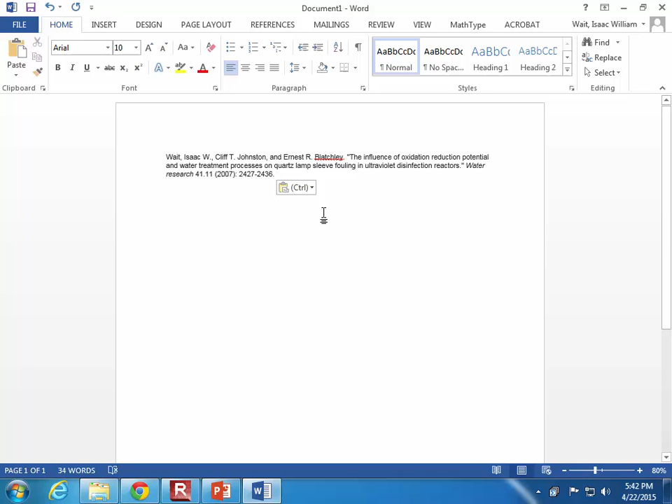Questions about the research paper due next week? Why do you suppose I've asked you to write a research paper? Is it because I just like to have you in pain? Is that the reason?

Why do you think? It's partly because I like you to be in pain.

But the main reason is because graduate school is more about learning how to teach yourself than learning a certain subject. People who have graduate degrees are assigned to unfamiliar tasks. If you graduate with only a bachelor's degree, probably you'll be designing something that's already been done somewhere else. But once you have a master's or doctorate degree, they'll start to assign you to a problem that nobody has ever seen before.

Someone with a graduate degree has to have practice with an unfamiliar problem and learn where to start finding the current research being done in the field, because maybe your problem is on the cutting edge of some new field.

A master's educated engineer has to be able to draw together lots of different sources. Even if 95% of a research paper is irrelevant to you, maybe they'll mention one or two things, just a tiny bit that will be important. So you have to get in the habit of finding the important information in a paper that, for the most part, means nothing to you.

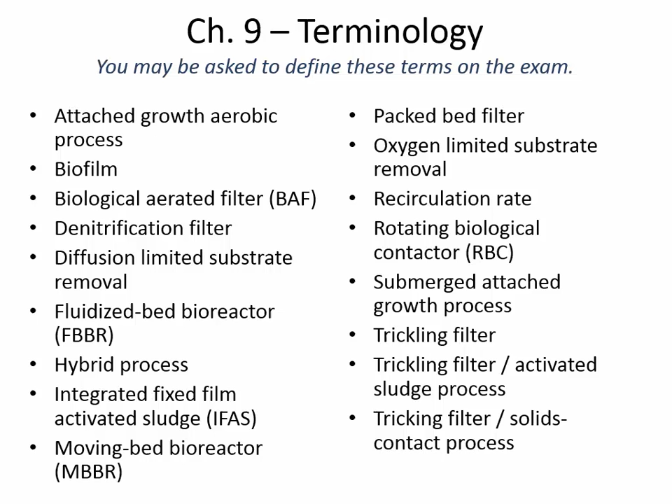What we're talking about tonight is anaerobic treatment. We've had some brief sections previously where we've had anaerobic conditions inside a reactor, for example, when removing nutrients, conditions need to be anaerobic.

In aerobic treatment, you have to provide the oxygen, and that's expensive because you're usually providing it with a diffuser, with big fans blowing air into the diffuser so it can bubble up through the aeration basin. Even with a trickling filter, where you save a lot of money compared to activated sludge, you still have to pump the water to the top, so you're still spending money in electrical costs to provide the oxygen.

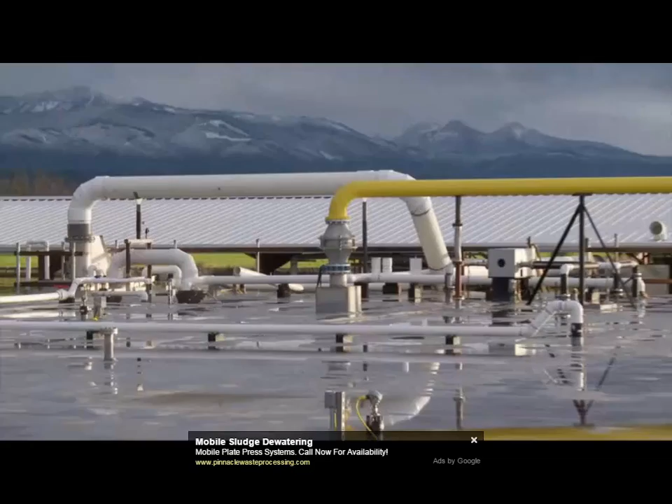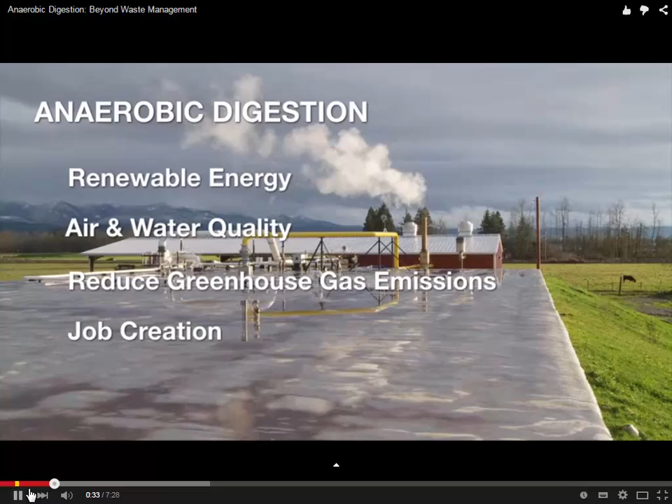Technology offering many benefits to society. Far too often, though, this method of organic waste treatment is touted only for its ability to produce renewable energy. However, anaerobic digestion also helps improve air and water quality, reduce greenhouse gas emissions, and can even be a source of job creation for local economies. Furthermore, the next generation of anaerobic digesters is at the center of a system of technologies capable of producing even greater benefits.

Digesters have been around for a while, but we've got new technology that allows us to take this to a better place economically and environmentally. Traditional methods of dealing with organic waste include sewage treatment plants, aerobic lagoons, compost yards, and landfills. However, unlike anaerobic digesters, these solutions more often than not consume rather than produce energy.

Digesters come in many different designs. Some treat municipal sewage or urban food waste, others process animal waste. In this video, we will use the example of a rural, dairy-based system. But whatever their design, all digesters follow the same underlying concepts.

Anaerobic digesters are basically carbon conversion tools. They simply take the organic carbon inside the manure and turn it into gaseous inorganic carbon, called biogas. Biogas is methane and carbon dioxide. It's the methane that we really want - we can use it for fuel or as power or electricity.

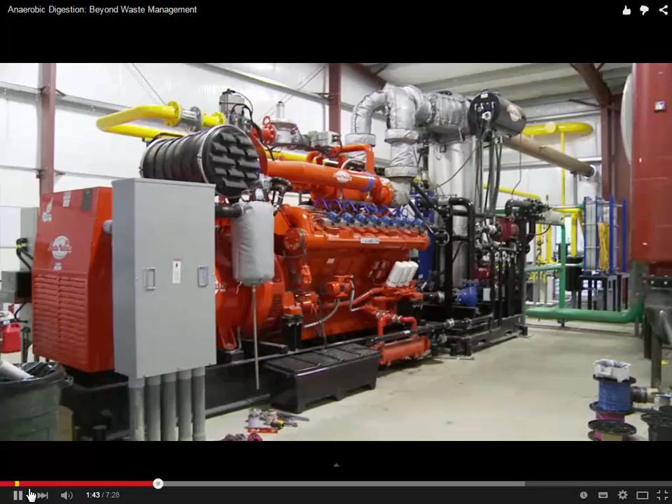Without anaerobic digestion, manure management has traditionally been limited to simply storing untreated manure in lagoons and later applying the untreated liquid onto fields. However, this practice leads to potential air and water quality issues, such as nutrient overload into soils, release of phosphates and nitrates to water supplies, and emissions of odorous volatiles, ammonia, and greenhouse gases such as methane and nitrous oxide.

Anaerobic digestion, as part of a system of integrated technologies, can address all of these issues. It gives us the diversification to have more than one item to sell, and also helps us control the nutrients, the manure, and that sort of thing.

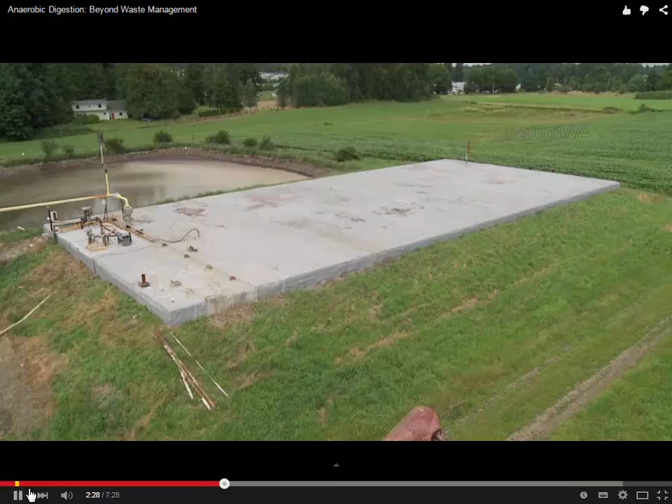At the center of the system is the digester itself, basically a sealed tank where the organic material is broken down. On this dairy farm, cow manure and potentially off-farm organics from the community are collected in a holding pit, then pumped into the digester. The tank mimics the digestion process of an animal stomach.

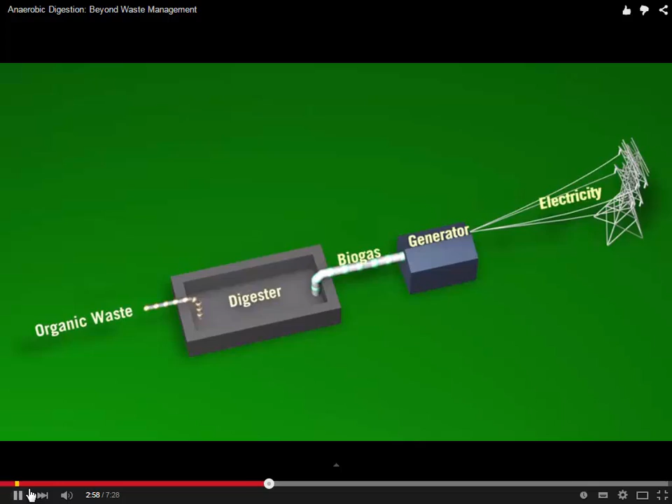Inside, the liquid is heated, agitated, and mixed in an air-free environment. This converts the solid carbon in the manure to biogas, which is collected, cooled, and used to power an electrical generator. The electricity can be sold to the local utility and sent out to the grid. The system itself creates the energy needed to keep the process going - temperature and flow are maintained using excess biogas and heat reclaimed from the generator set.

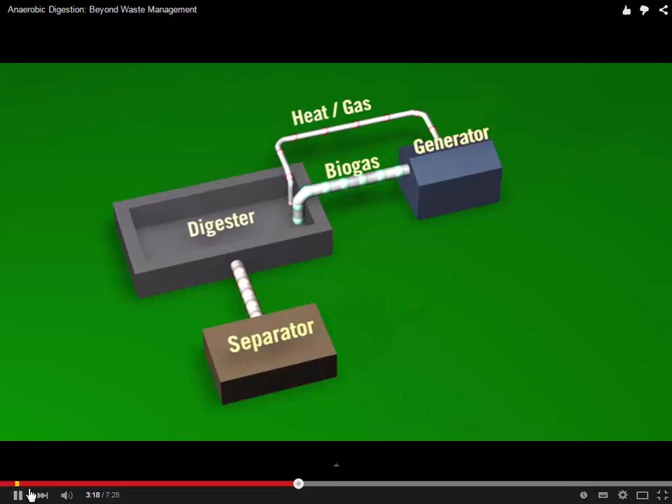After the biogas is captured, the treated manure is pumped to a separator where the liquid is removed. The remaining solids can be used by the dairy as bedding for their animals, or even sold for profit as a soil amendment or peat moss replacement. The treated liquid is stored in a lagoon for watering crops. Unlike untreated lagoon water, this liquid is significantly reduced in pathogens and virtually odor-free.

For the current generation of anaerobic digesters, this is where the treatment process usually ends. However, even greater benefits and value can be gained by adding additional components to the system.

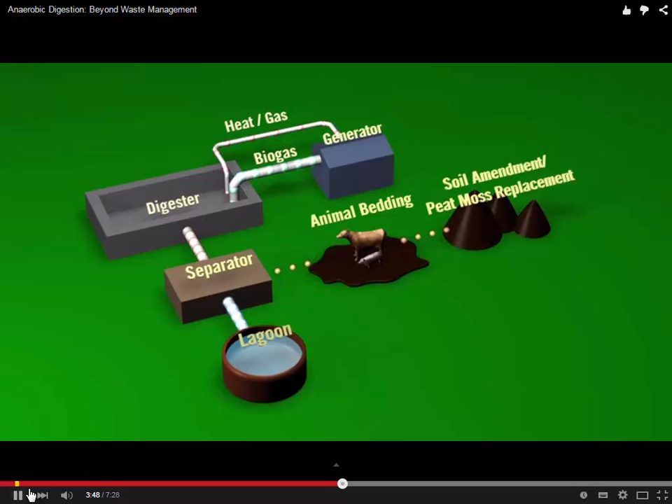One example is nutrient recovery. Anaerobic digesters by themselves do not do a very good job of treating the nitrogen and phosphorus in the manures or organic waste. Too much fertilizer, too much nitrogen and phosphorus, can be harmful for the soil and plants, as is the case at some of our large animal farms. Therefore, we need nutrient recovery units associated with our digesters.

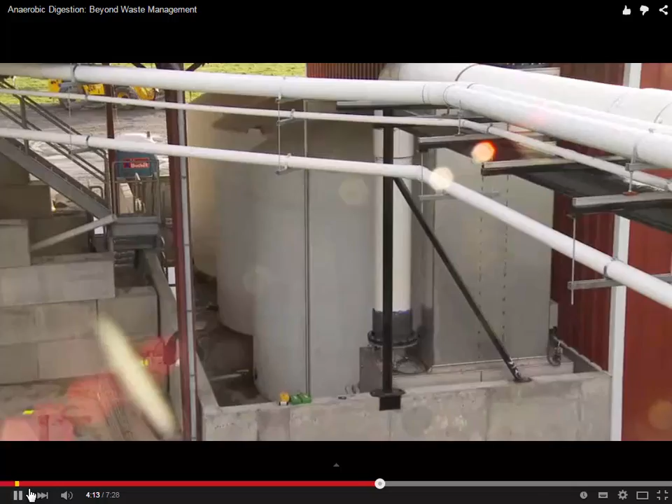Nitrogen, in the form of ammonia, can be reclaimed using a revolutionary new technology developed by Washington State University and its industrial partners. The process is far less expensive than existing methods. We can collect it and make it into an ammonium sulfate fertilizer that farmers have traditionally used for years. An added benefit is that during this ammonia production process, we cause the phosphorus to settle out—so we get a 2-for-1.

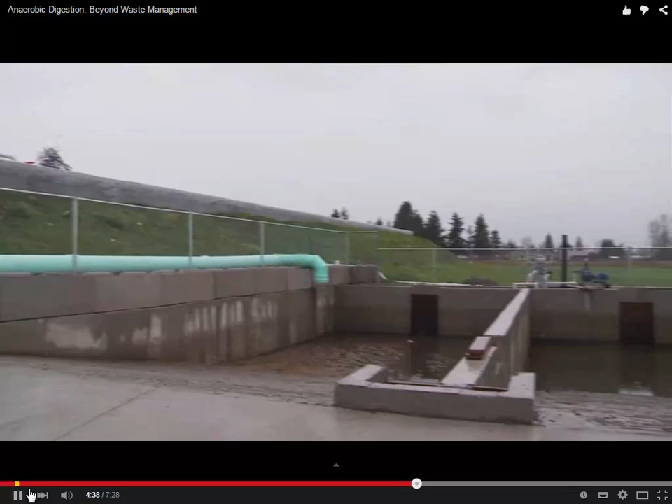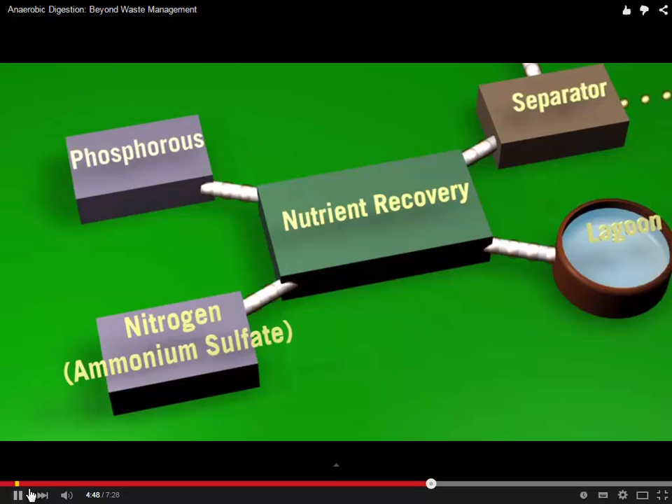These concentrated biofertilizers can be used by the farmer to displace what they presently buy in fossil fuel-based fertilizers. A combined digester and nutrient recovery system is a win-win because we make renewable energy, solve a concern with nutrients, and make revenue for the local community.

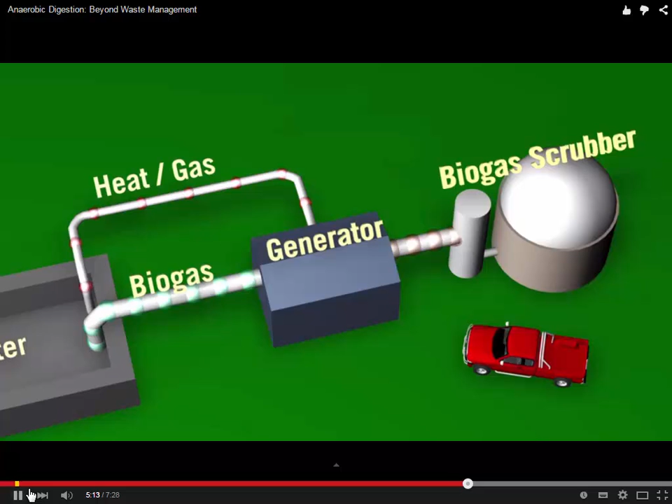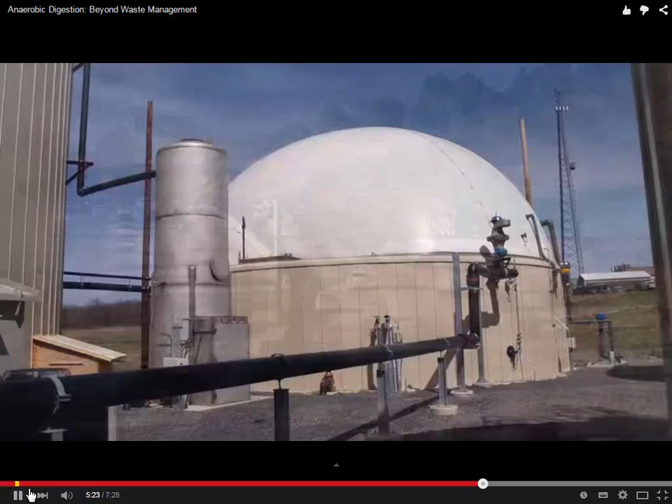Another add-on technology relates to the scrubbing and compression of biogas. In this type of system, biogas is converted to renewable natural gas fuel instead of being used to generate electricity. We're in the middle of a shift from petroleum-based fuels to methane fuels, natural gas, for trucking fleets and cars. We have the technology now to produce renewable natural gas from the biogas that comes off the digester.

It's clean to pipeline standards, and available as vehicle fuel for half the price of diesel. While biogas scrubbing and nutrient recovery are already at commercial scale, pyrolysis and other related technologies are currently in development and hold great future promise. In the future, we'll be able to take this the next step to clean, even drinkable water.

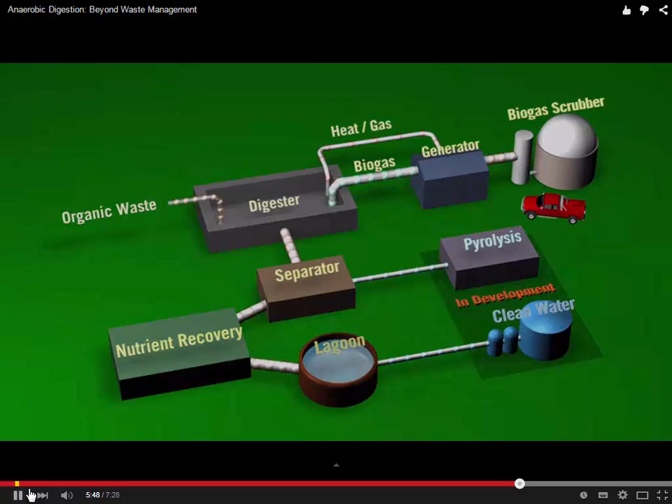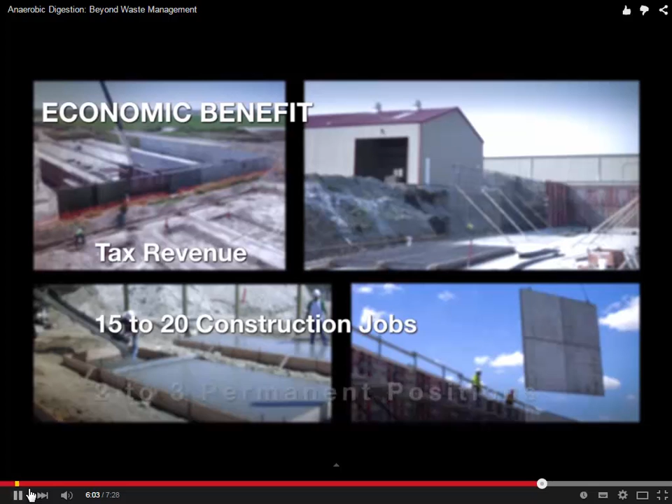Construction of anaerobic digester systems helps state and local economies as well. In addition to tax revenue, it's estimated that in the state of Washington, for example, each digester project creates 15 to 20 full-time jobs during construction and 3 to 8 permanent positions for its operation.

Despite their initial capital cost, with well-conceived business models, anaerobic digester systems offer significant economic savings and environmental benefit over the long term. Everything kind of comes in, goes around, and goes back out as something usable.

There are synergies with this systems approach. We not only have the digester, but we've got these additional units we can plug on, and that requires more capital, but also generates a lot more revenue, making a more profitable package and making this more replicable.

The advantages of anaerobic digestion are well documented: waste management, renewable energy, biofertilizer production, greenhouse gas reduction, and more. With the incorporation of existing technologies and the development of future ones, the benefits will only continue to grow.

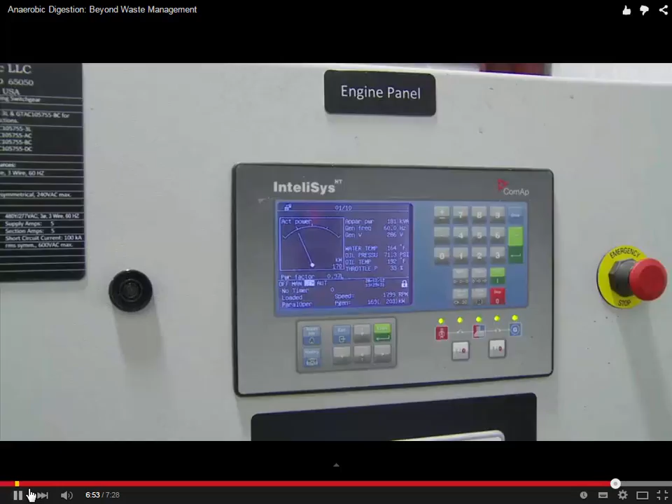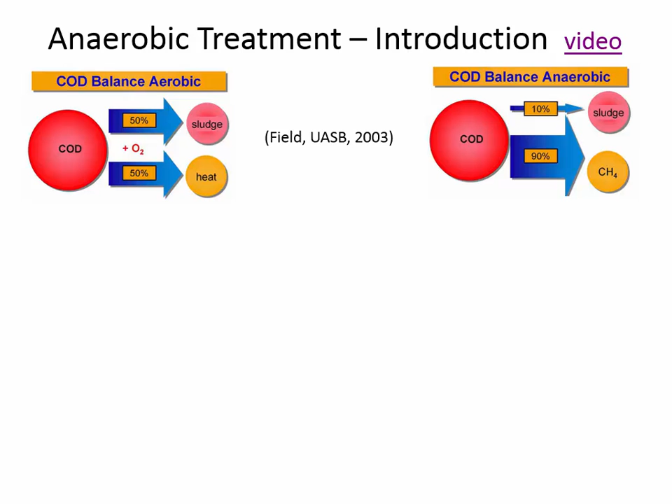So, although that was talking about mostly animal wastes, the same principles apply for treating municipal waste and waste generated from humans as well. These anaerobic treatment processes can be used along with suspended growth or attached growth, and can be used to treat the sludge that comes out of a clarifier of either of those. There are a lot of different configurations of what goes on inside of that pit.

In the video we just watched, it basically looked like they had grass growing on either side of the tank and then a concrete top on the tank. So what's going on inside that anaerobic digester is what we're going to spend some time talking about this evening. As far as the chemistry, what's happening inside—first of all, the complex waste components have to go through a process of hydrolysis.

Hydrolysis breaks down fat and protein into less complex molecules—triglycerides, fatty acids. Then the next step is that those products are turned into short chain acids. Let me show you a diagram here: the complex waste is broken down into acetic acid.

Then, in parallel, both acid fermentation and methane fermentation are happening simultaneously to form carbon dioxide and methane. Regardless of whether or not you have anaerobic digestion, much of that carbon is ultimately going to end up back in the atmosphere. But the benefit of doing anaerobic digestion first is that you have an intermediate step where the methane can be used to generate heat and electricity.

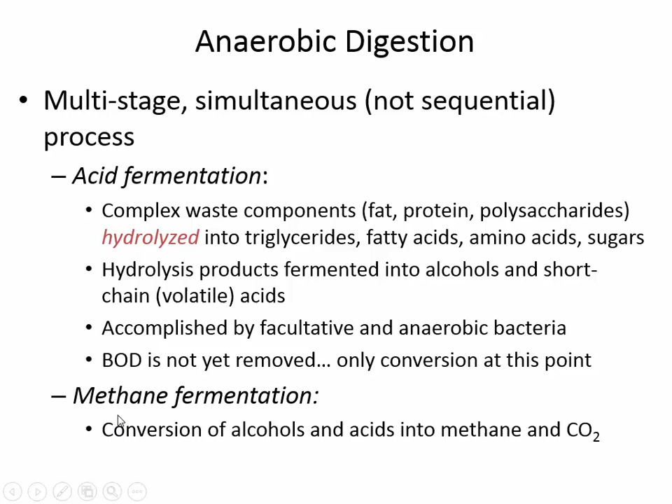So if we go back here, the methane fermentation—really the step that generates the value—is where you're converting alcohols and acids into methane.

There's less volume of sludge that has to be treated, and the reactor volumes are actually smaller as well. The reason is that the waste is a lot more concentrated than it would be if you're doing aerobic treatment. The suspended solids concentration in an anaerobic reactor can be 20,000 milligrams per liter or even beyond, compared to a typical solids concentration in an aeration basin of maybe around 2,000 milligrams per liter.

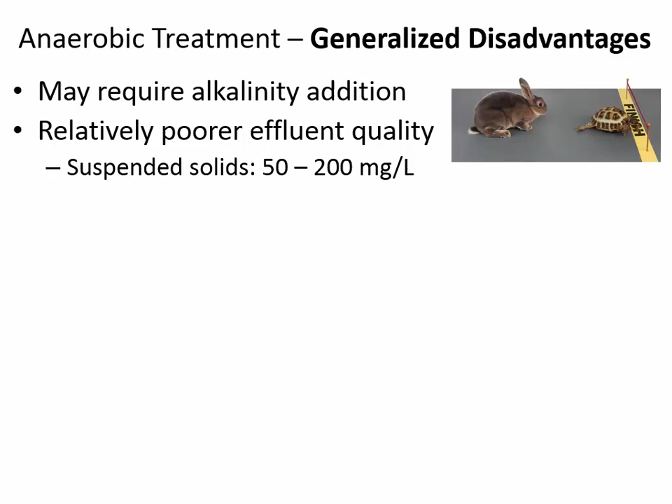Another thing is that although it's really good at converting dissolved COD into methane, there's not a lot that the anaerobic digester is going to do for suspended solids. So this typical suspended solids effluent quality is still going to be above treatment limits. It's not just a one-step solution and then the effluent is ready for discharge—that's not the case, primarily because of suspended solids.

Then there can also be long startup times, three months or even more, before the reactor is actually performing at steady state. As mentioned in the video, it's good for breaking down carbonaceous pollutants, but the anaerobic digester itself doesn't remove nutrients. The animated diagram they kept coming back to showed that you have to have separate steps to remove the nutrients and then recycle them as fertilizer elsewhere—it's not in the anaerobic digestion that nitrogen and phosphorus can be removed.

Also, as shown in the previous slide, there's a necessity of diverting some of the methane to heat the anaerobic digestion reaction. If that heating is lost and the liquid starts cooling off, there is a huge reduction in the efficiency of anaerobic treatment when the temperature goes below 20 degrees Celsius.

Some anaerobic digesters can be very susceptible to toxic substances, and because hydrogen sulfide can form in wastewater, that can cause odor problems or corrosive gas, and it's also harmful for people, as we've talked about before. So it's an anaerobic environment, meaning sulfate can go to H2S.

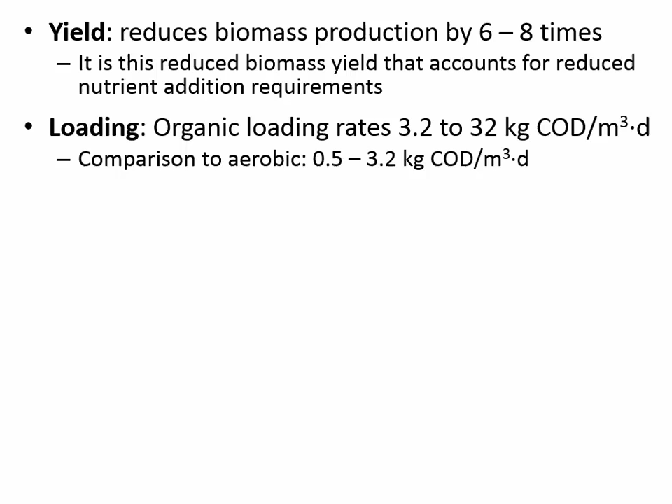This is measured in kilograms of COD per cubic meter of digester volume. These loading rates are 10 times higher than we'd see for an aerated secondary treatment basin. Compared to aerobic treatment, the max would be 3.2 kilograms per cubic meter, compared to 32 kilograms of COD per cubic meter for anaerobic treatment.

We've already talked about alkalinity and how the reaction basically consumes alkalinity because CO2 is speciating into carbonic acid. The problem with temperature is when it gets below 20 degrees Celsius, part of the chemical reaction gets stuck, and fatty acids accumulate. So let's go back to this chemical diagram.

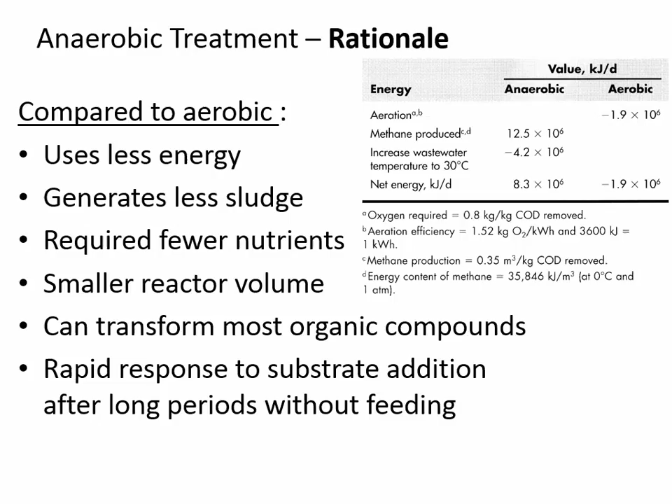Methane fermentation is particularly sensitive to temperature, while acid fermentation isn't. It's a two-step process, but one of the two steps stops below 20 degrees Celsius, so you get an accumulation of intermediate products. When that happens, foaming can occur inside the anaerobic digester. So it's a real challenging issue when temperatures go too low.

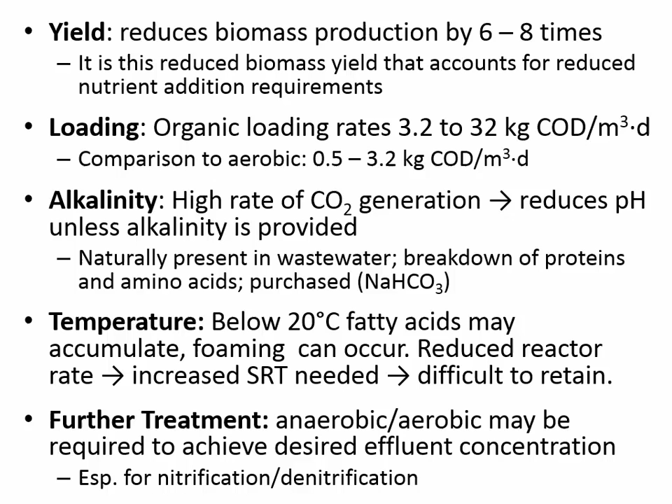And remember, the video said you have to have additional treatment beyond anaerobic digestion, especially for removal of nitrogen and phosphorus.

So where would you use anaerobic treatment? Here are some of the perfect places for it. It's good when there's high BOD, and it's good when there's less nutrients, since it doesn't remove nutrients—we'd love to find an application where that's not an issue. Places with already elevated water temperature are good too, because that means you use less of the methane to heat the water before treatment.

So breweries, where water coming out of an alcohol distillery or brewery is heated in the process of using it—that's great. Food processing in general, typically the water is used not only to process the food but also to cool the food products, so the water itself is warmer than it otherwise would be. So here are just a few cases of industrial wastewaters where anaerobic digestion can be pretty effective.

Food processing wastewaters have really high COD concentrations. If you don't have at least 1,500 milligrams per liter, that's not enough for the methane to generate enough energy. So you can't just replace secondary treatment with an anaerobic digester—that's not a high enough COD. It has to be something more concentrated than that.

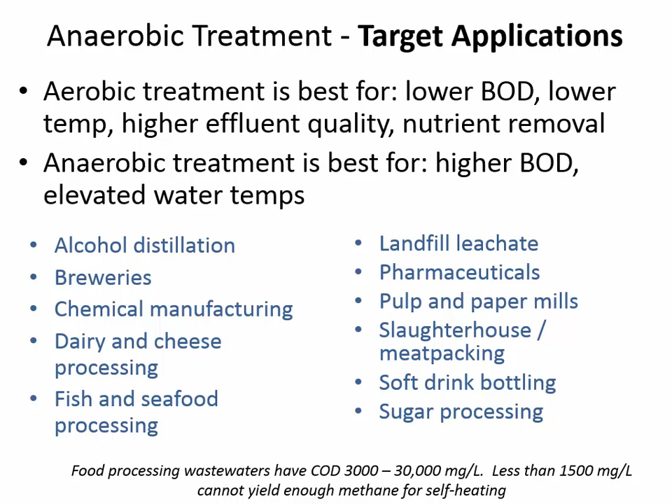So it could be the sludge solids coming out from underneath the secondary clarifier—that would have a high enough BOD concentration, but not just the raw water going into secondary treatment, because a typical COD concentration of the wastewater might only be around 200 milligrams per liter. Here in Huntington, when we went to the treatment plant, they said they have a really low strength wastewater, about 100 milligrams per liter. But the sludge coming out of the clarifiers might be up in the range where it would be effective for anaerobic digestion.

So how much alkalinity is going to be used depends partly on the temperature and the speciation of carbon dioxide into carbonic acid. If you haven't yet taken the aquatic chemistry class, you'll take that in the future—I think it's offered in the fall—and you'll go through calculations relating to acid dissociation.

Another thing that factors into it is what fraction of liquid gets into the gas phase. Inside an anaerobic digester, it's sealed—that's what makes it anaerobic—but it's not liquid to the very top. We'll see some diagrams of these anaerobic digesters later tonight, but they have lids on them. Part of them is liquid, part is gas, and that gas consists of CO2 and CH4, methane. So the CO2 that's in the gas above the liquid is going to be dissolving down into the liquid, and that's what Henry's law describes: what fraction of the gas will dissolve into water.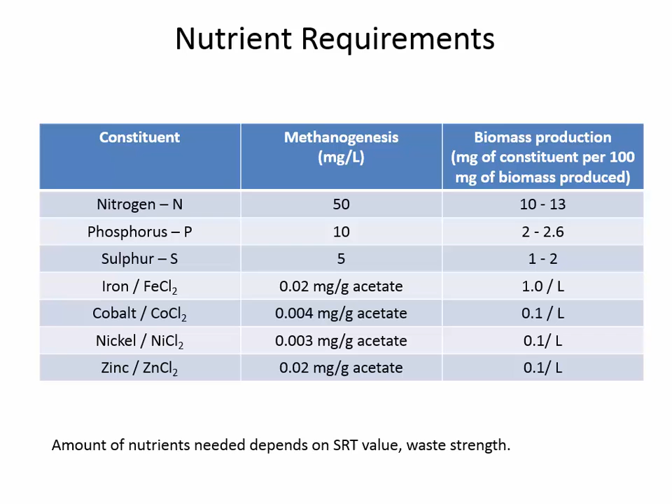One of the perfect applications shown in the previous slide was soft drink bottling plants, where you're cleaning out the bottles—maybe for reuse of bottles that are being recycled—you have to wash the bottles, and the sugar water that's in the soda has to be broken down. It's a really high COD. In the case of Pepsi, it may not have cobalt, iron, or sulfur in the water being treated, so in that case the nutrients might have to be seeded for the anaerobic treatment to be effective.

The flip side of nutrients, which stimulate growth and are required for it, is inhibitors. These are things that slow down anaerobic digestion—that's not the same thing as completely stopping it, though. Sometimes we confuse the idea of an inhibitor with something that will stop the anaerobic digestion process completely.

This first table is showing what concentration is required to moderately inhibit or strongly inhibit the anaerobic digestion process. For example, sodium, which is added to roads during the winter when salt is put down to melt ice, can end up in wastewaters, but it requires a pretty high concentration of sodium before there's inhibition of the anaerobic treatment process. So it requires a lot of some of these things.

But this next table shows the concentrations of some organic pollutants don't necessarily have to be high at all. These are very low concentrations, millimole concentrations, that will result in a 50% reduction in activity of methanogenesis—that's the secondary reaction of fatty acids being converted into methane. Lauric acid, for example, at 2.6 millimoles per liter, would result in the activity being 50% of what it otherwise would have been.

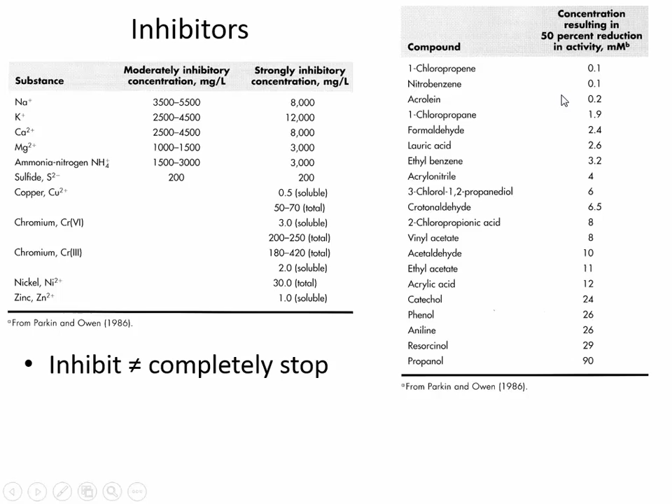Over time, though, you can have a shift in the microorganisms present inside a reactor, and the activity can recover. If it's going to be a persistent inhibitor, the acclimation process means the organisms might be able to get used to some of these pollutants over time.

One way to protect anaerobic treatment is to have it in sequence—in other words, a plug flow reactor—where instead of the incoming liquid spreading out through the whole reactor, you have several different reactors operating in series. That would give you a chance to protect the methanogenesis, which is more sensitive to toxics.

So just to do some calculations tonight, let's take a look at the quantities involved with anaerobic treatment. Here we've got an example relating to the formation of methane gas. As a typical rule of thumb, every gram of COD that gets converted inside an anaerobic digester is going to generate about one third of a liter of methane gas, at standard temperature and pressure of 1 atmosphere and 0 degrees Celsius.

Just to reiterate, in an anaerobic environment, hydrogen sulfide can possibly form. Malodorous means it smells bad. Toxic means it's very dangerous to human health. In fact, if you do a Google image search of hydrogen sulfide, most of the images you'll find are of people laying on the ground.

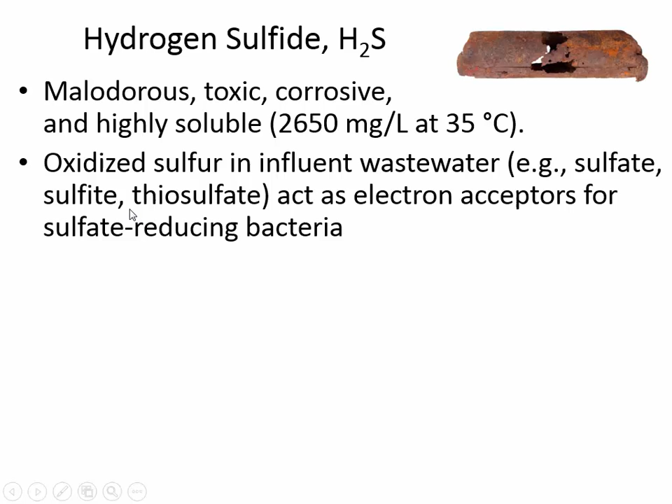It can dissolve in water, so it's not only in the gaseous state, but can also be transported long distances dissolved in the water that needs to be treated. In a wastewater treatment plant, the origin of hydrogen sulfide was sulfate, sulfite, thiosulfate, and then bacteria turn it into hydrogen sulfide in the absence of oxygen.

One of the issues why it's especially a problem inside an anaerobic digester is that it can slow down methanogenesis. It can rob you of the methane you're trying to form, because you want to turn that into electricity.

The text quotes that as low as 50 milligrams per liter of hydrogen sulfide can reduce methanogenesis by 50%, so it can really slow things down. You do have to have some sulfide in order for there to be methane production, but you need sulfide, not necessarily hydrogen sulfide.

So it's sort of like you need a little but not too much. The toxicity of hydrogen sulfide to the bacteria in the anaerobic digester varies based on the pH of the water and what type of organisms have set up inside the reactor. So it's not always as cut and dry as 50 — that's why there's a range of how much hydrogen sulfide is required to start cutting back on methanogenesis.

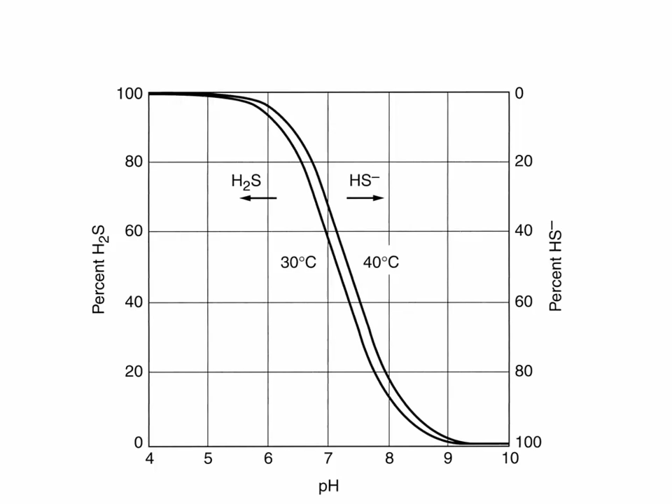This figure shows at what pH you're going to have hydrogen sulfide present versus the sulfide ion. The higher the pH, if you've got a pH of 9 or 10, then the vast majority of it is going to be as the sulfide ion rather than as hydrogen sulfide.

Ammonia is also a problem for the generation of methane, because it can interfere with the conversion of the intermediate alcohols into methane.

Likewise, pH is important for speciation. NH4, ammonium ion, is the majority of what's present until you get to a pH above 9, and then the prevalence of NH3, free ammonia, takes over. So at a pH of 7.4, neutral, only 2 to 4% of the ammonium is as free ammonia.

So you can have a fair amount of ammonia inside a solution. The text says that between 5,000 and 8,000 milligrams per liter are tolerable, and you'll still have methanogenesis if the reactor has adjusted to that over time.

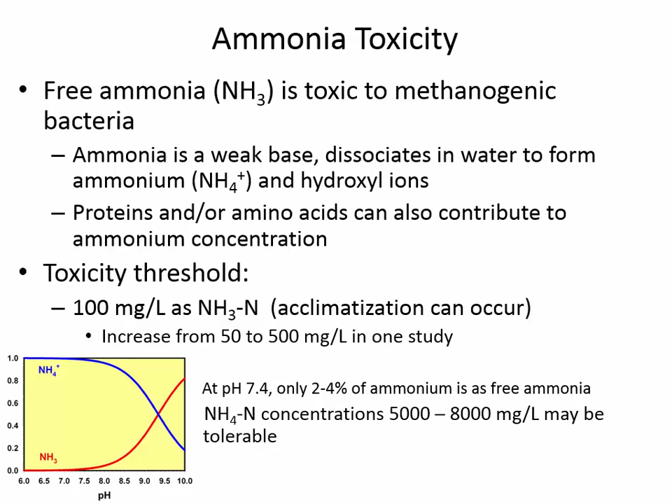Initially, before acclimatization, as little as 100 milligrams per liter can start to be toxic and slow down the generation of methane. So the nutrients not only aren't removed, but in excess concentrations can actually interfere with the primary objective of anaerobic treatment, which is to break down BOD into methane.

So for the next couple of slides, we're going to look at pictures of different reactor configurations and talk about the pros and cons of certain configurations, and look at the typical loading rates — how much COD is going to go into each cubic meter of volume.

The simplest of them is a complete mix suspended growth anaerobic digester. The influent comes into a tank that has an enclosed headspace above it, so that no oxygen is in contact with the liquid, and also so that the gas that's generated can be captured.

Inside here, the residence time of the liquid and the solids is the same, because there's no recycle of solids. So the solid particles, meaning the bacteria and suspended solids, the mixed liquor, have the same storage time as the water inside this reactor — between 15 to 30 days is what's required.

There's a video here that illustrates a typical anaerobic sludge digester, and this is in Michigan.

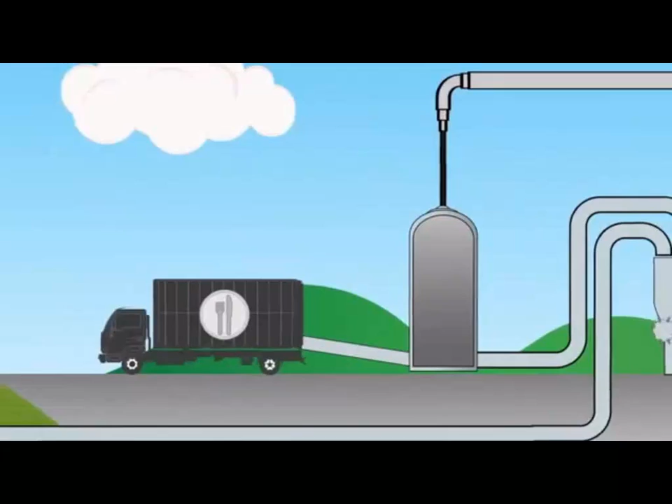This anaerobic digester is used to reduce odor emissions from manure and biosolids, create a closed cycle for recycling organic material, and generate renewable energy. The digester uses dairy, food waste, biosolids, which are nutrient-rich organic materials, and other organic material from campus and the greater Lansing area.

So what's going into there is food from campus, so what's left over from Harless Dining Hall, right? They have some animal manure, and then biosolids from wastewater treatment, so sludge. So what's going in here is sludge, food, and animal manure.

Once delivered, the food and biosolids will be heated at 160 degrees Fahrenheit for 1 hour to eliminate any potential pathogens. The material will then be mixed with manure from the MSU Dairy Teaching and Research Center and pumped into the digester.

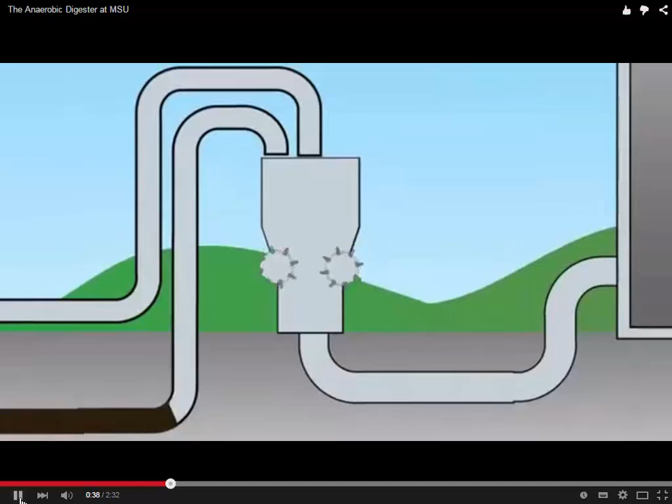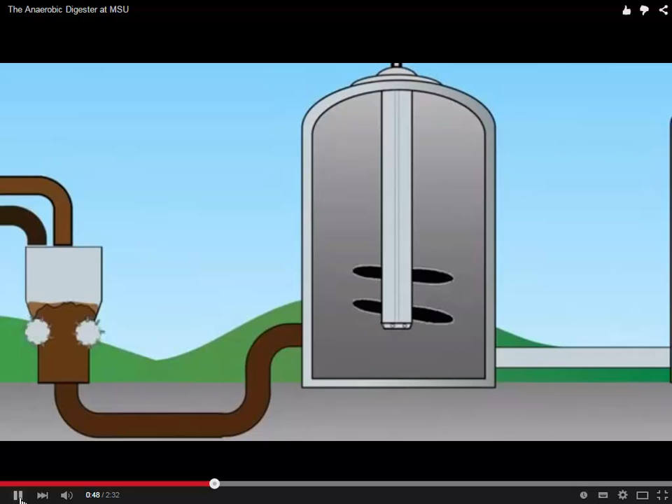The anaerobic digester is a sealed, airtight tank which can hold 300,000 gallons. Organic material will be heated to 100 degrees Fahrenheit and will remain in the digester for 20 to 30 days.

Inside the tank, mixers in the digester evenly distribute microorganisms. These microorganisms break down the mixture, producing biogas and nutrient-rich digestate.

Biogas, which is roughly 60% methane, is a form of renewable energy which will be used to generate electricity. The system will generate enough electricity to offset the MSU Dairy Teaching and Research Center by around 300 kilowatts per hour, with enough left over to help power MSU.

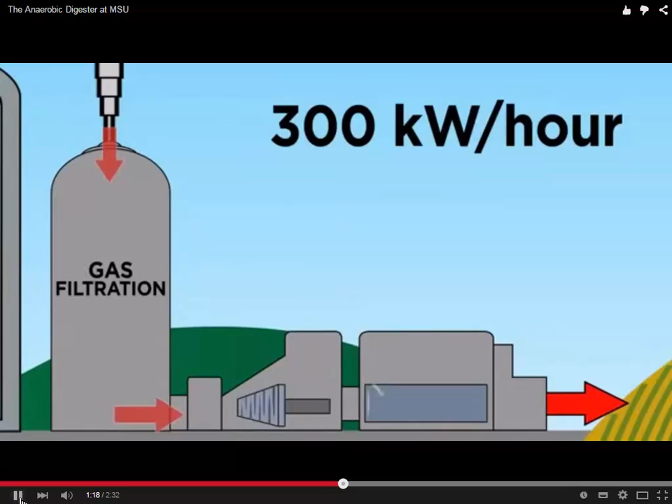The capturing and use of biogas will generate energy, shrink the carbon footprint of campus, and improve sustainability.

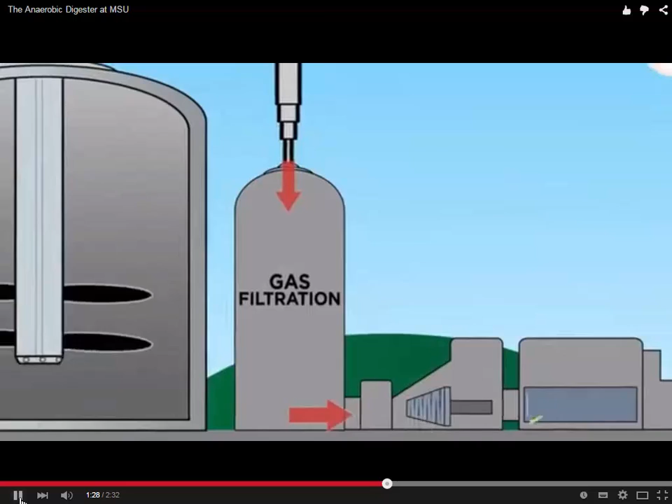What's left in the process is digestate, the nutrient-rich mixture that will be held in the final storage tank until it can be utilized. Mixers in the storage tank will minimize settling for the potential 2.7 million gallons of digestate. Any unused biogas can also be stored in a sealed headspace.

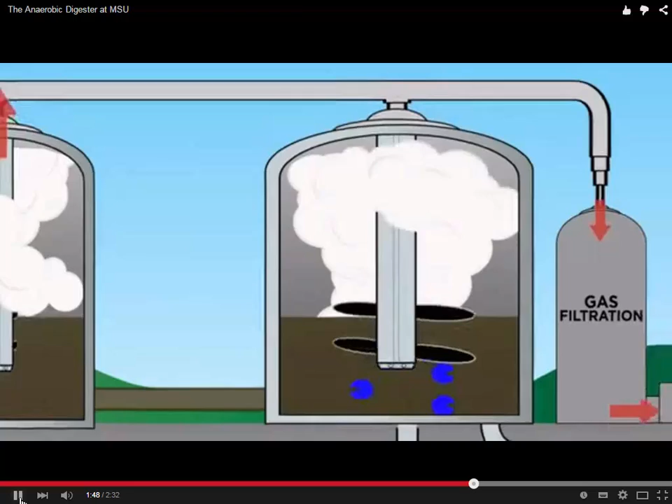The nutrient-rich digestate will be used to fertilize croplands or other biological treatment processes to fuel research opportunities.

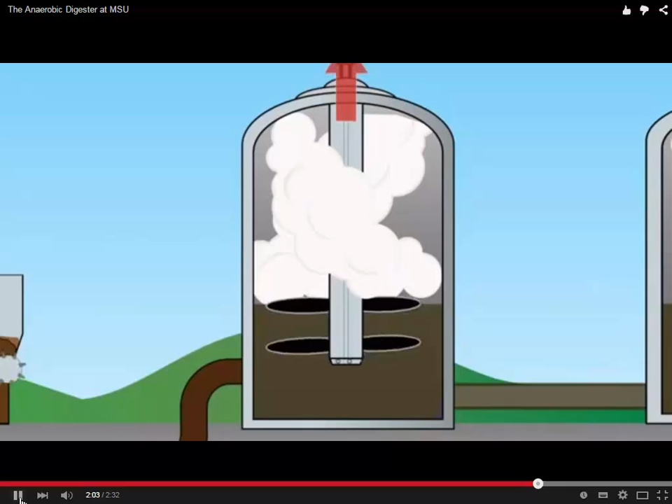By utilizing anaerobic digestion technology, the organic materials from MSU will become resources. Renewable energy is created while odors are reduced and emissions are eliminated. This project is one example of how Michigan State University is actively working to improve sustainability.

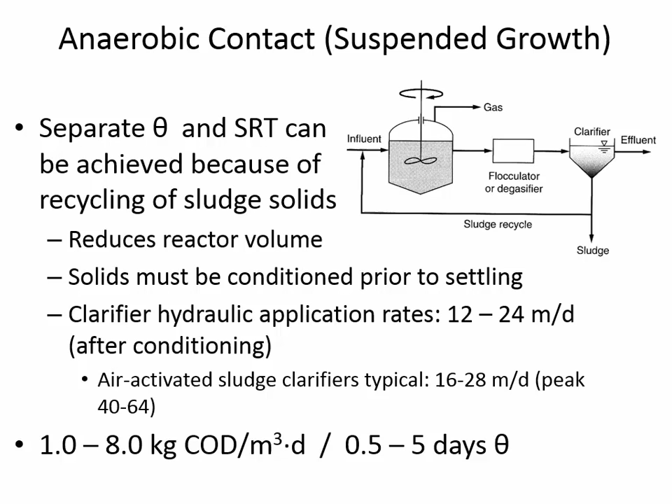Okay, the next one to look at is a sequencing batch reactor. That was one of the questions that was on the concept check that we had earlier tonight. What is a sequencing batch reactor?

We talked about sequencing batch reactors for suspended growth activated sludge. Well, it turns out that the same idea of a reactor acting in different sequences can also be used in an anaerobic environment. So let's take a look at this video. The video is actually about an aerobic sequencing batch reactor, but my guess is that we'd benefit from just thinking about what is a sequencing batch reactor and then apply that into anaerobic conditions. So here's just a pretty good video that shows a sequencing batch reactor.

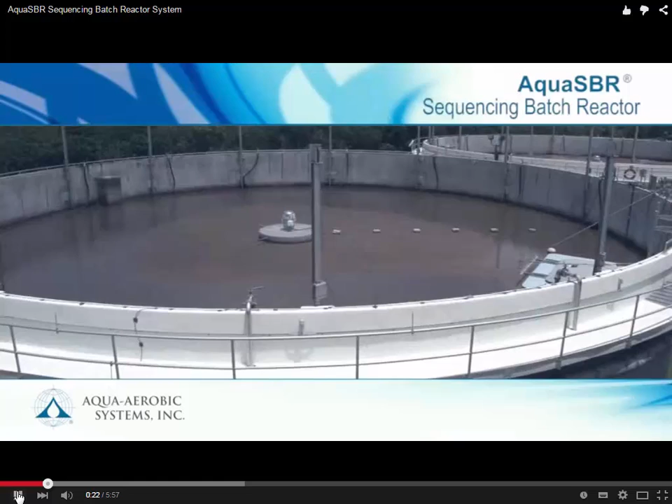With nearly 3 decades of batch reactor experience, Aqua Aerobic Systems continues to lead the wastewater industry with reliable and cost-effective treatment solutions capable of removing nutrients, reducing phosphorus, and producing reuse quality effluent. The Aqua SBR sequencing batch reactor system features time-managed operation and control of aerobic, anoxic, and anaerobic processes with flexible process control that easily adapts to changing effluent demands.

Operation of the Aqua SBR is a 5-phase process, beginning with mixed fill. In this phase, flow enters the reactor.

Okay, so it's called a sequencing batch reactor. It's talking about the first of the sequences. The first sequence is the filling stage.

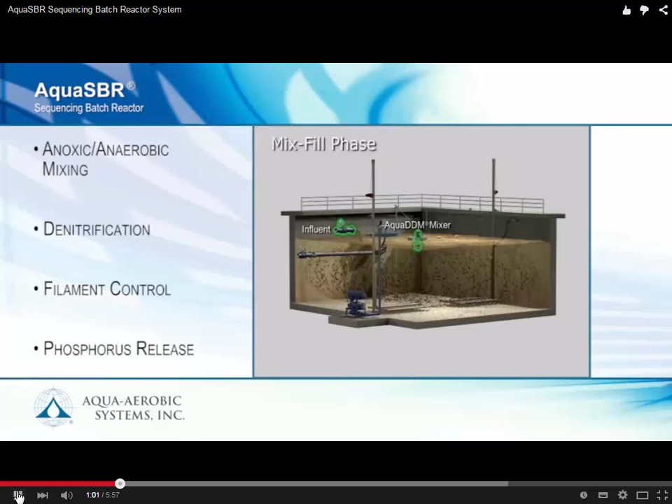A complete mix environment is achieved with a dedicated Aqua DDM mixer. The absence of dissolved oxygen and rapidly depleting nitrate levels create the ideal anaerobic environment, promoting biological phosphorus release. This phase also operates as a fully adjustable selector process to control filamentous organisms.

In the react fill phase, wastewater continues to fill the reactor and aeration is introduced. During aeration, organic material is oxidized and phosphorus is absorbed, while ammonia is converted to nitrates.

Okay, and obviously, if we're talking about a sequencing batch reactor for anaerobic treatment, there wouldn't be any aeration. So we have to keep in mind that you can use the sequencing in both an aerobic environment or an anaerobic one. Today we're talking mostly about anaerobic digestion. This reactor would have a roof on top so there's no contact with oxygen, and they wouldn't bother aerating if what they're going for is anaerobic digestion.

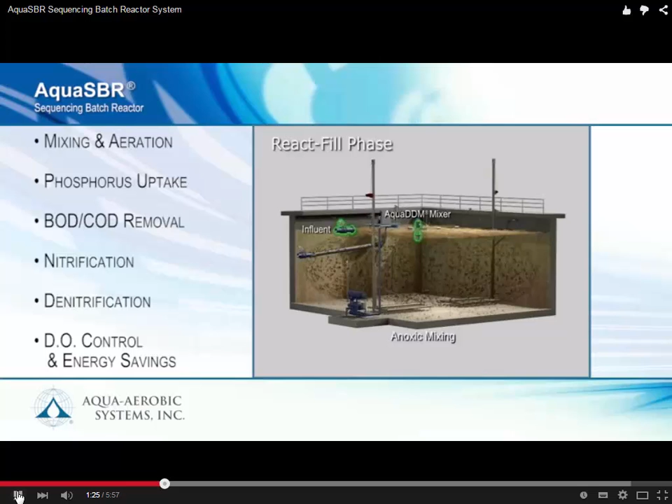Unique to the Aqua SBR is the ability to offer discrete intervals of aeration and anoxic treatment. These intervals can be controlled by simple timers and dissolved oxygen control. For more advanced oxygen control, the IntelliPro process management system can be utilized to monitor ammonia, nitrate, oxidation reduction potential, or phosphorus concentration. This advanced oxygen control module proactively adjusts oxygen levels based on changing conditions and delivers the exact amount of oxygen needed to the reactor at any given time. This is just one example of the IntelliPro system's process control capabilities.

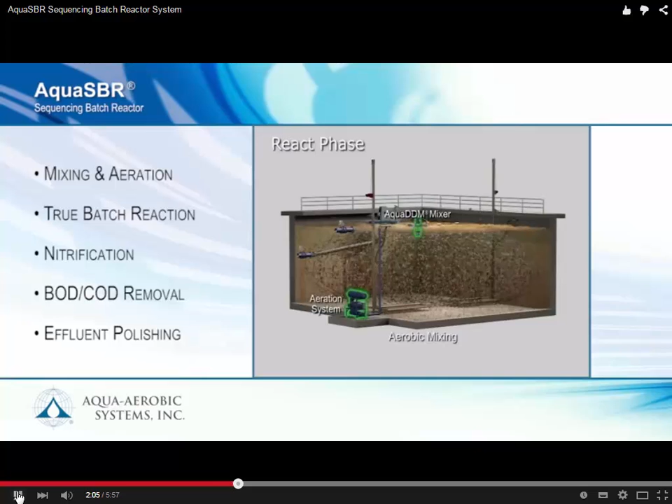The Aqua SBR features a true batch reaction period, which is identified as the react phase. In this phase, the influent valve is closed as wastewater is diverted to a companion reactor or equalization basin.

Okay, so they're talking about during the react phase, it's no longer accepting incoming flow. So if that's the case, the incoming flow has to be going somewhere else. If it's not going into this tank, it has to be going someplace else. And so in a sequencing batch reactor, you always have to have more than one tank. At the very least, you need to have two, because as soon as you stop the inflow to one tank, you have to be sending it to another.

But ordinarily, there would be a lot more than just two reactor tanks at a sequencing batch reactor, because eventually they're going to start emptying this tank. So there would be one that's emptying, one that's filling, and one that's reacting at the very least, and possibly more than that for the matter of redundancy. But what it's going through now is a reaction phase. In an anaerobic digester, they wouldn't be aerating, but they would have stirring, mechanical stirring inside the reactor to ensure that the solids stay suspended.

Mixing and aeration continue to further reduce pollutants in the absence of raw wastewater. The react phase offers a positive treatment barrier to ensure ultimate polishing of the wastewater prior to settling and discharge.

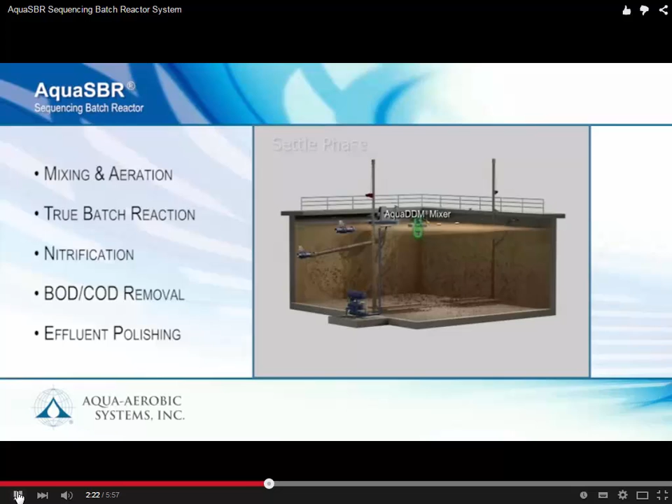In the settle phase, influent flow is terminated and mixing and aeration equipment are turned off. Ideal solids-liquid separation is achieved due to the quiescent environment, allowing the reactor to function as a perfect clarifier.

When he says quiescent, do any of you know what the word quiescent means? Think about a normal clarifier, like in Huntington, that clarifier always has water coming in and water going out. It's a tank, and it's supposed to be very calm inside the tank, because you don't want the water swirling around. If the particles are supposed to be settling, any sort of flow in or flow out of a settling basin is going to disturb the downward motion of the particles.

One of the things that's really nice about a sequencing batch reactor is that it's completely isolated during the settling phase. So the sludge solids can settle to the bottom without any sort of disruption of outgoing or incoming flow. This phase is also true of an anaerobic digester, in that you can get really good settling results and a nice thick concentrated sludge of the solids that are left, because it's so quiescent. Quiescent means calm, a very calm environment with no turbulence inside of the clarifier.

As with all Aqua SBR treatment phases, operational flexibility allows the user to adjust the settling time to match the prevailing needs of the plant. Due to the batch feature of this process, the settle phase is unaffected by variations in flows that cause disruption to settling in conventional flow-through secondary clarifiers.

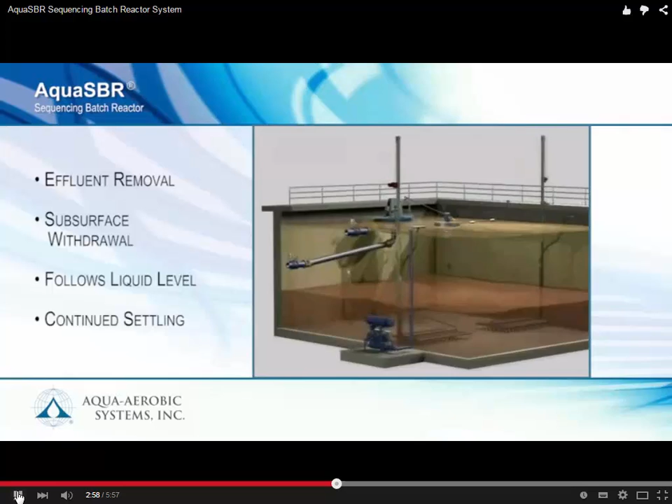The final phase of the Aqua SBR is the decant phase. At this stage of the process, the clarified water must be removed from the reactor, equal to the same volume that entered during the filling phases.

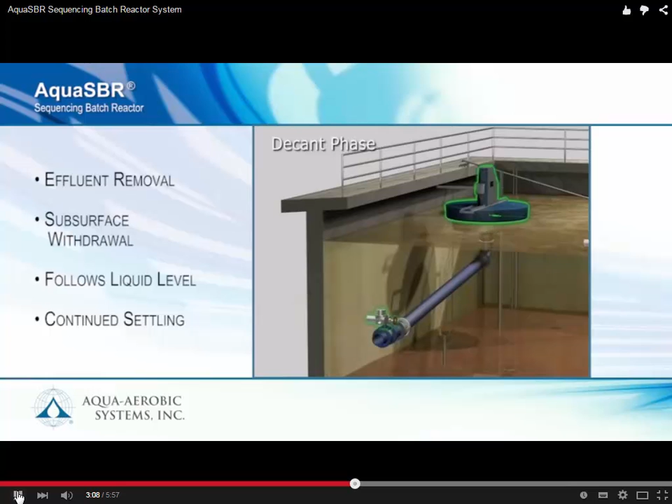Throughout the decant phase, influent flow is not allowed to enter the reactor, and the aeration and mixing equipment remains off. The robust design of the Aqua Aerobic decanter provides unequaled reliability in subsurface effluent withdrawal, with more than 3,000 units installed. Effluent quality is protected by two separate barriers, a stainless steel weir and a valve on the discharge pipe.

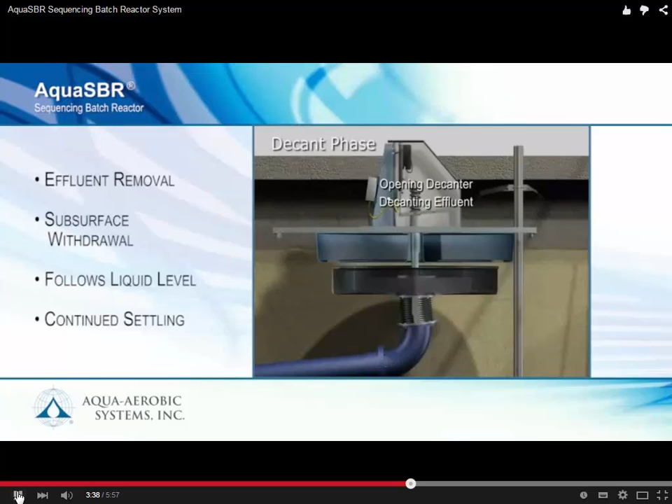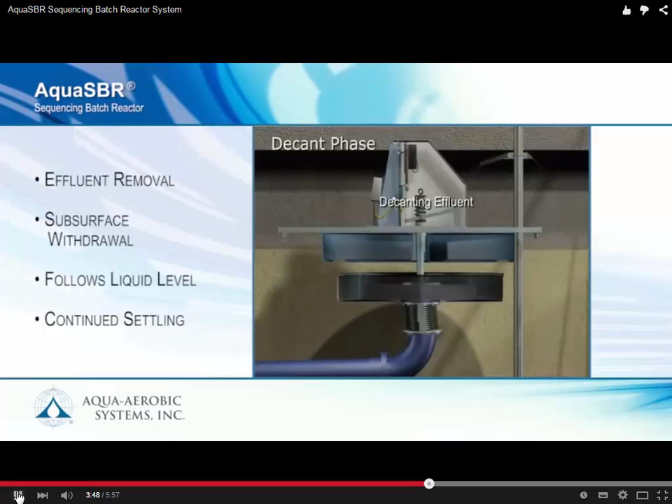This dual barrier prevents solids entry into the unit and further protects the system from solids discharge. To open the decanter, an electric actuator lowers the weir and the valve opens, allowing clear effluent to exit the system. Among its many features, the decanter floats and adjusts to varying water levels, assuring that only the highest quality effluent is being removed.

The decanter closes when level indicators determine a low water level set point has been reached. The discharge valve closes and the weir seals against the float, preventing any solids from entering the decanter during non-decant phases.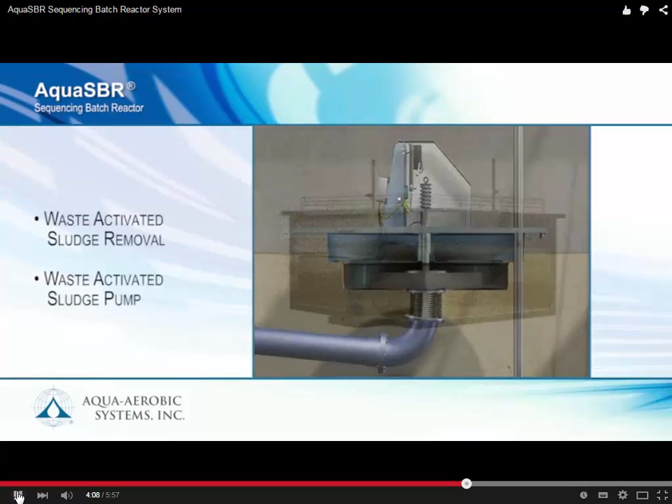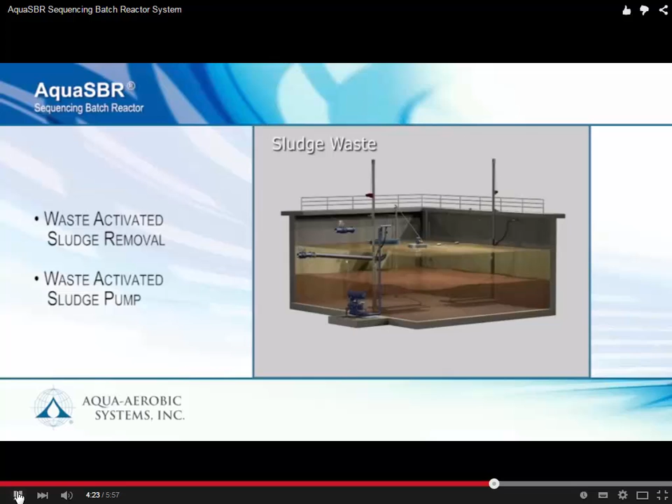In the final minutes of the decant phase, a small amount of excess biological solids will be removed or wasted to a sludge holding facility. This process is typically accomplished with a small submersible pump, which operates for only a few minutes per cycle, as needed to remove the thickened sludge.

So what they were talking about there is that rather than recirculating sludge, you suck some of it out and waste it, and then the rest of it you just leave in the tank, because pretty soon you're going to be pumping new wastewater in, and retaining some of the old mature sludge solids will accelerate or activate the process once it begins in the next cycle of the sequence.

So I just wanted to show you that video because it wasn't specifically about anaerobic treatment, but I thought it does a really nice job helping you to visualize what a sequencing batch reactor does. And so that sequencing batch reactor concept can be applied directly to anaerobic treatment.

How is the bacteria staying alive? Possibly 200 days, is that all?

Well, the bacteria that are in there don't require oxygen. They're using other things as the electron acceptor, so they are specially adapted to anaerobic conditions. In the same way that, remember, in denitrification, there are bacteria that are consuming nitrate and turning that to nitrogen gas—that's what they're using instead of oxygen, as nitrate. So here, there are bacteria that are living on alcohols and turning that into methane.

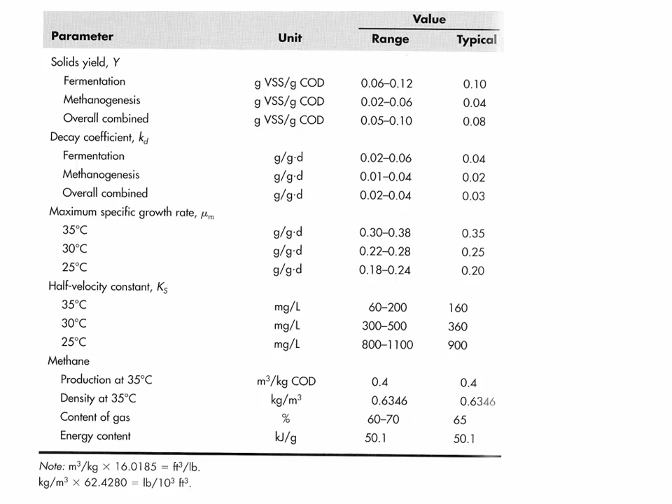For the reactors we've looked at so far, here are some typical values having to do with the yield, the decay coefficient. The decay coefficient just relates to how quickly the bacteria are dying—that's the kinetics of endogenous decay. Maximum specific growth rate—these parameters should be familiar from the calculations we did with activated sludge. If you compare these kinetic values to the ones for activated sludge, you'll see that everything's slower with anaerobic treatment. It's a slower reaction, but it's the trade-off of getting some energy out of it.

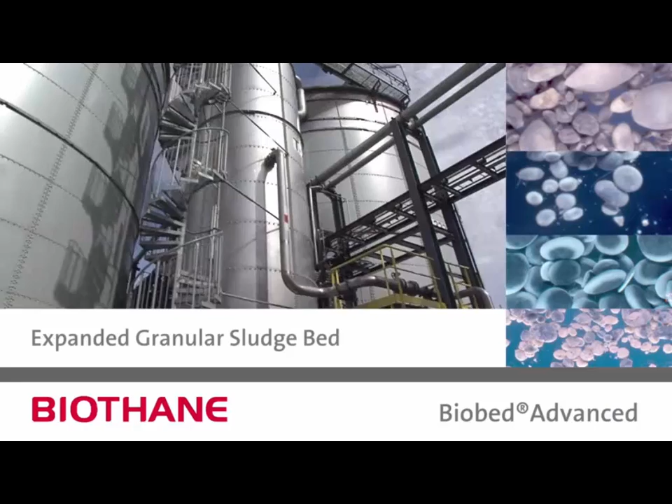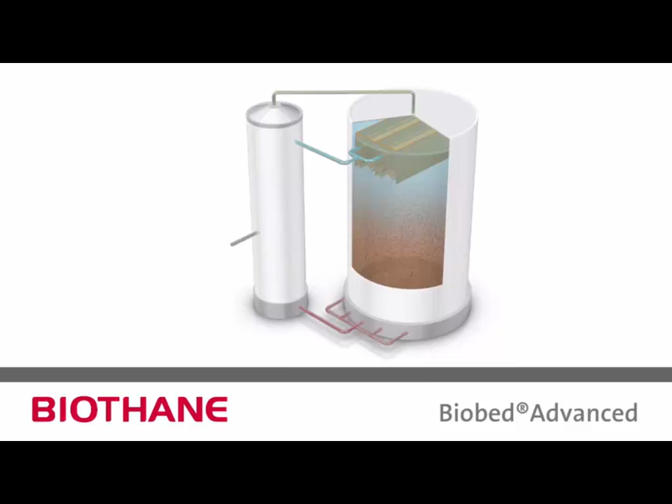Biothane is a global leader for anaerobic industrial wastewater treatment. Its granular-based technologies have successfully been applied in over 530 plants worldwide. Faced with our clients' demands for reducing investment and operating costs, we have developed the novel, cost-effective BioBed Advanced system. UASBs are renowned for their high COD removal efficiency and the ease of maintaining granular sludge. EGSBs are more cost-effective and have a small footprint due to the applied high loading rates and the tall reactor design. The challenge in developing the BioBed Advanced Reactor was combining the excellent performance of the UASB with the cost-effectiveness of the EGSB.

In granular sludge systems, it's all about keeping the biomass in the reactor. The advanced settler achieves multi-level gas separation, but also provides a large settling area for good biomass retention. Higher liquid and gas velocities are applicable, which result in a more compact design. In numerous full-scale systems, pilot plant testing and model hydraulic testing, the superior performance of the BioBed Advanced system has been proven.

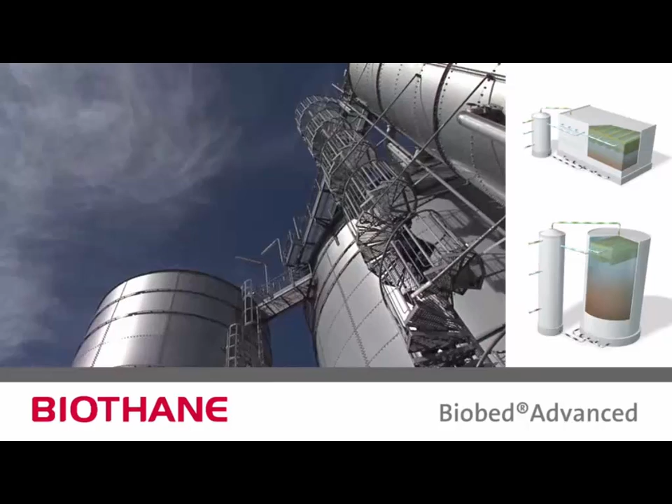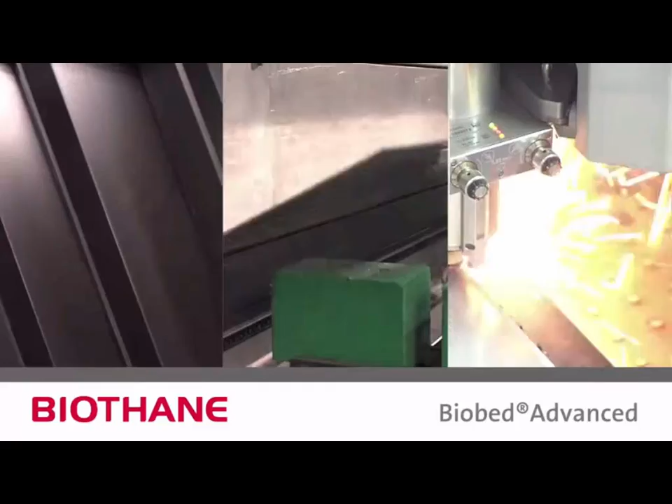The system can be built as a completely closed system, ensuring no odor emission. The round steel tanks or square concrete tanks can be built up to 20 meters high. The compact settler is constructed in durable stainless steel and polypropylene. The settler price is reduced by using advanced manufacturing techniques. It can be transported cost-effectively in standard sea containers.

The BioBed Advanced technology has been applied in numerous full-scale plants, treating pulp and paper, chemical and food processing wastewaters. The experience from full-scale plants has shown that the BioBed Advanced system is more stable and reliable, and thus achieves lower overall operating costs. The system can be completed with... All right, we'll leave it there for that one.

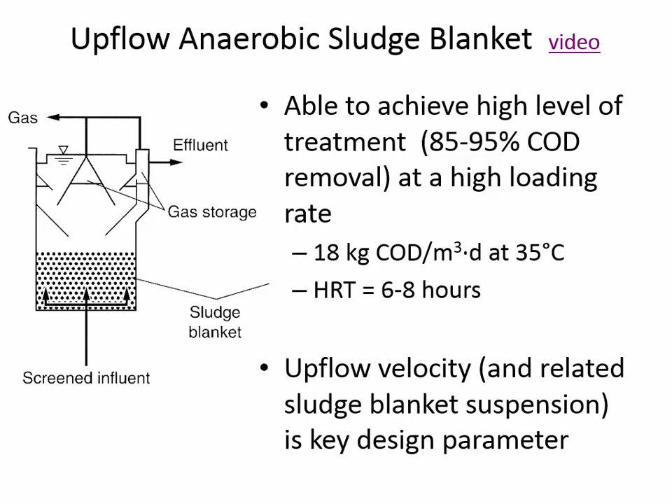The point it's making is that there's upflow for the water being treated, and what they were talking about is the abbreviation UASB, upflow anaerobic sludge blanket, and they were also referring to granular sludge nodules. A granular sludge is kind of an interesting thing.

It starts off as just an ordinary sludge, but over time matures into these nuggets that are floating around. What makes them desirable, the benefit of a sludge granule, is that it settles very quickly. When you have a solid particle like this, it's really easy to keep in place. So the towers can be shorter than usual because of high liquid flow rates, and you can achieve a high liquid flow rate if it's easy to settle the sludge. These granules are screened so that the effluent is much easier to keep separate from the sludge solids. That's the benefit of the granular sludge.

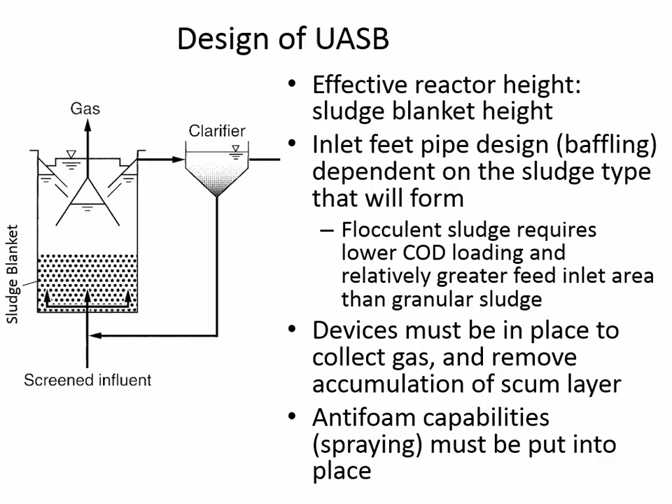Now, when designing something like this, they'll try to figure out how thick the sludge layer is going to be - here is the layer of the sludge blanket. It's important at the bottom of the reactor to diffuse the flow so you don't have it all coming in one jet, but diffusing it ensures the entire cross-sectional area of the tank has liquid flowing up through it. The other important thing is some sort of baffle system to collect the gas and separate it from the liquid that's going upward.

Plug flow reactors where you're introducing the liquid at different locations throughout the tank? Well, it can. You definitely can have a staged plug flow reactor. This one that's showing isn't a staged plug flow reactor, but imagine a pipe like this, with water flowing through it.

So this is the reactor. You could have the incoming waste, instead of only coming in at one place, coming in here, some there, some here. So this is what a staged plug flow reactor would look like. But this is just a plug flow reactor, so we're comparing: if you have a reaction going into a tank and then coming out, why is it that a plug flow reactor will have better kinetics than the same volume, but all stirred together?